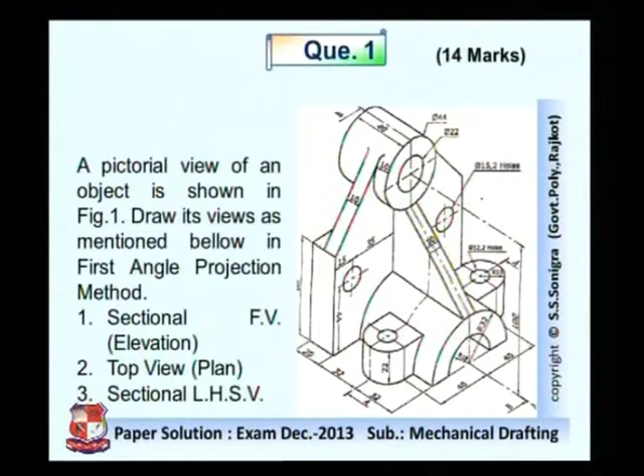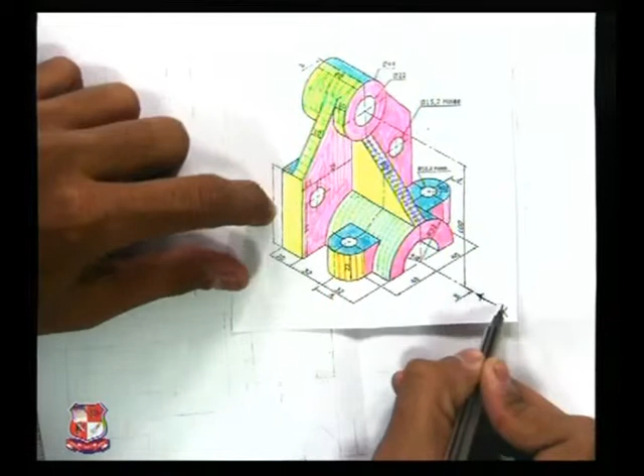See, this is an object which is given to us. In examination you will not be allowed to use colors, but you can imagine this colored portion from various views. Here an arrow is given; it means the front view should be drawn from this direction. If we look from this side, this pink colored portion would appear. Hence we have to draw all this pink colored portion with the given scale.

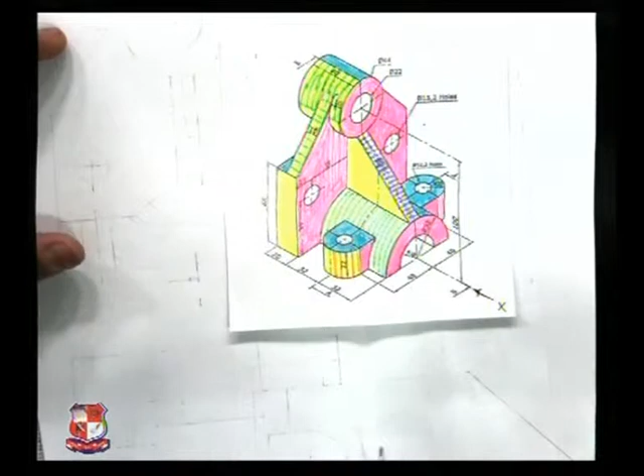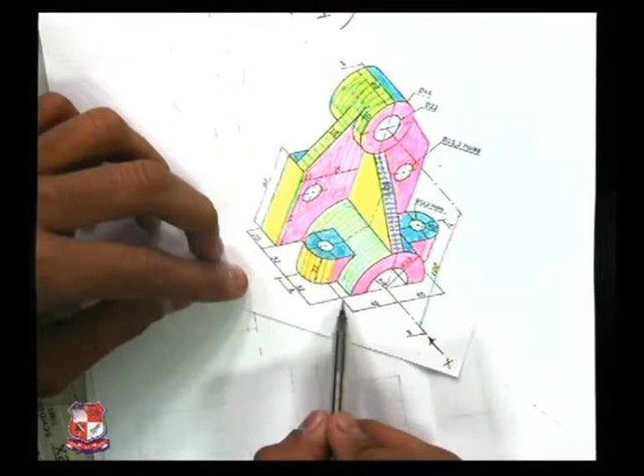Then the left hand side view is to be drawn to the right side of its front view, and the top view will be drawn below its front view. Hence we start from this corner. Here the width of this rectangle, means the width of its front view, would be: this is 40 from here to here, here to here 40, plus this radius which is given as 15. So 15 plus 40 plus 40 plus 15, that is 110 millimeter would be the total width.

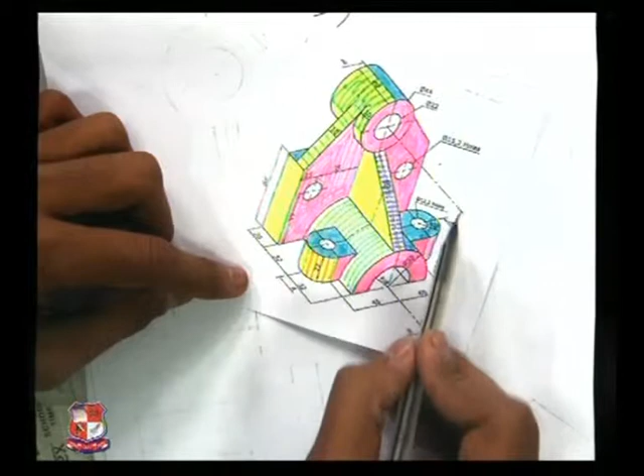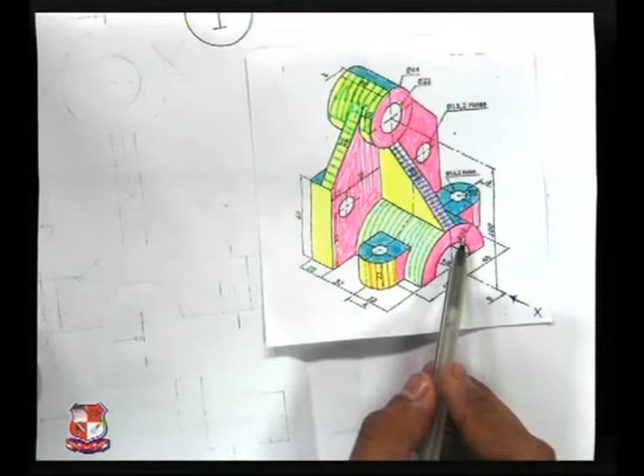So the width of this box is 110 millimeter, and the height of this box from here to here is given as 100, then 100 plus this radius 44, 144 millimeter would be the height of the rectangle in front view. So we start drawing its front view from this arc. Here an arc is given which will be visible, this pink colored arc. Outside radius is 32 millimeter and inside radius is 18 millimeter.

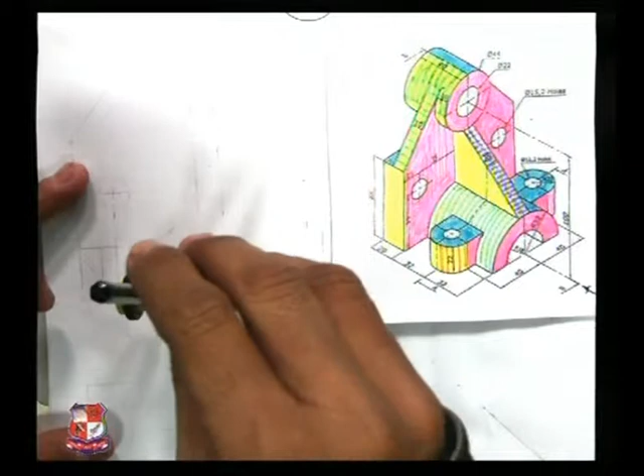So with the help of compass we can draw that arc. The inside radius is 18 millimeter, so here we draw an arc having 18 millimeter radius, and then the radius of the outside circle is given to us, this one, that is 32 millimeter. Hence take 32 millimeter as a radius and draw an arc like this. So these two arcs represent the half cylinder, which is here, this pink colored portion.

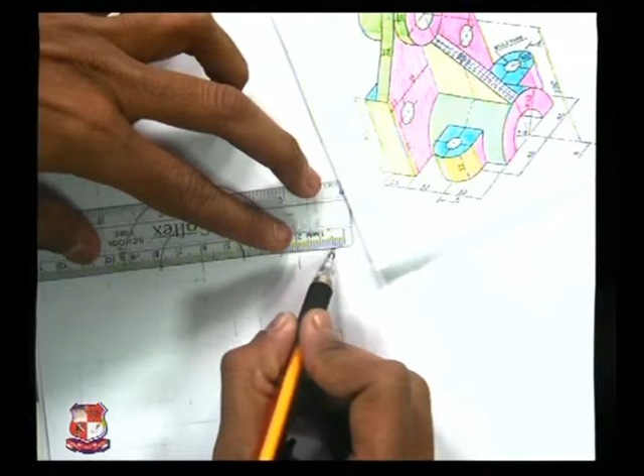Now think about this space. Here material is not there, hence it will not be visible, and these two edges would be fully visible. So that is to be represented by a full line like this. And here material is not there, hence that edge would not be visible, hence we trim that portion.

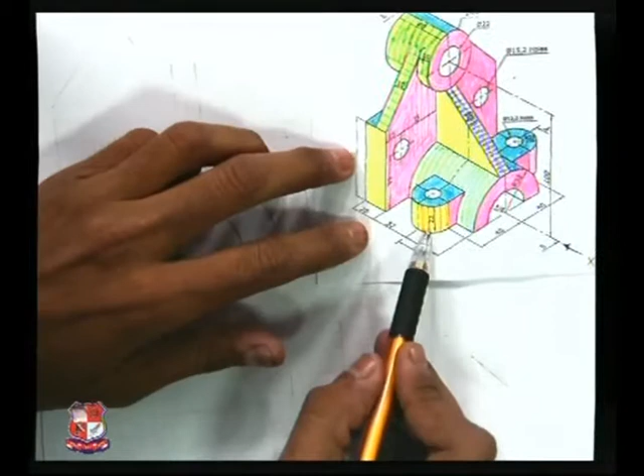So this edge from here to here, that we have drawn, and after that here this portion is there having height equal to 22 millimeter. So to draw this height of 22 millimeter, from this line at a distance of 22 millimeter on the upper side, draw a line from here to here. This total width is known to us, that is 40.

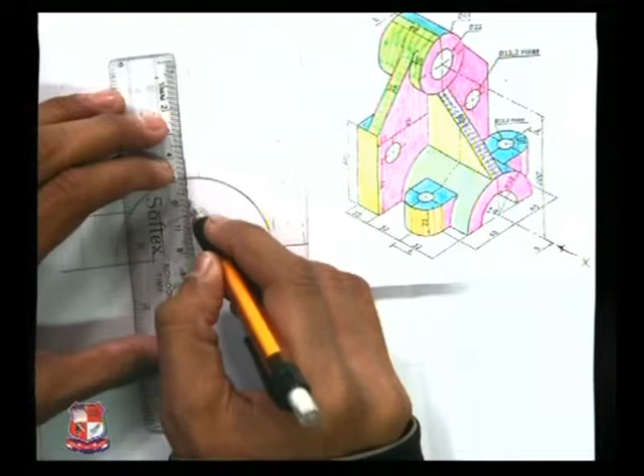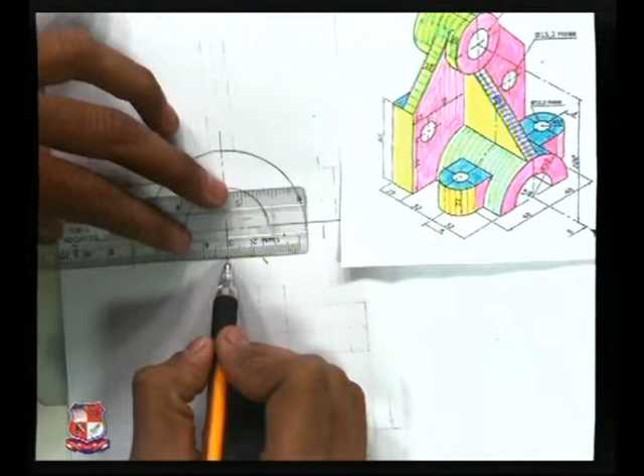The center line of this arc would be here, that we can draw like this. This is the center line of this arc. Here also a center line would be there, and from this center line at a distance of 40 millimeter on this side another center line is there, which is given in the data. So at a distance of 40 millimeter from here, draw another center line. This distance is 40 millimeter.

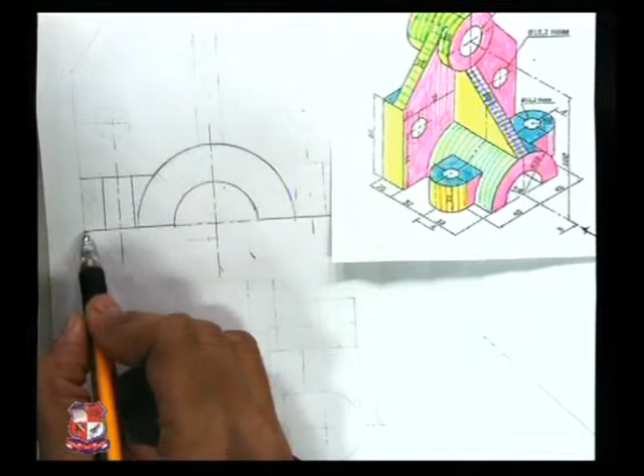Now here a circular hole is there, diameter is known to us, that is 12 millimeter. So 6 millimeter on either side, draw two vertical lines. It's a sectional view, so this hole will appear as two full lines. And here at a distance of 15 millimeter from the center, draw another line, 15 millimeter from this center to this side. So this one side is drawn. Similarly, on the other side the same object is there; as it's a symmetrical object, draw other lines like this.

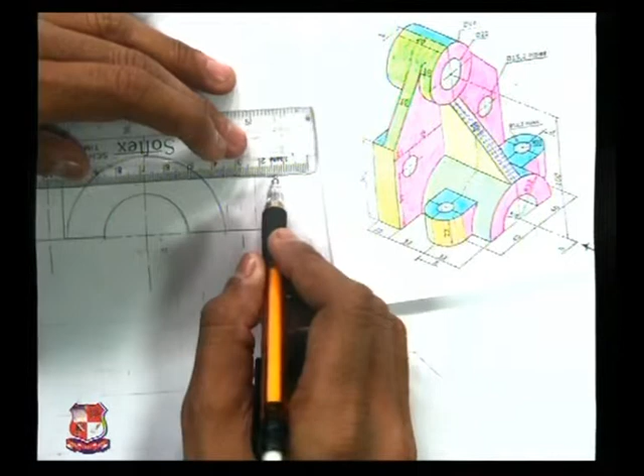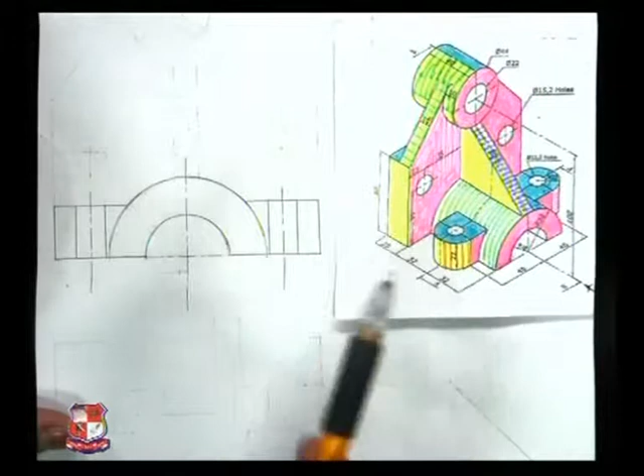And again here also draw a center line at a distance of 40 millimeter from the center of the two arcs we have drawn, and this represents a circular hole which is drilled over here. So till now we have drawn this pink colored portion and these two shapes.

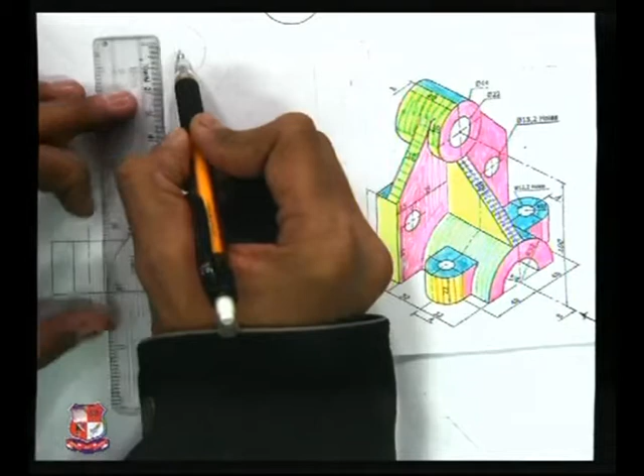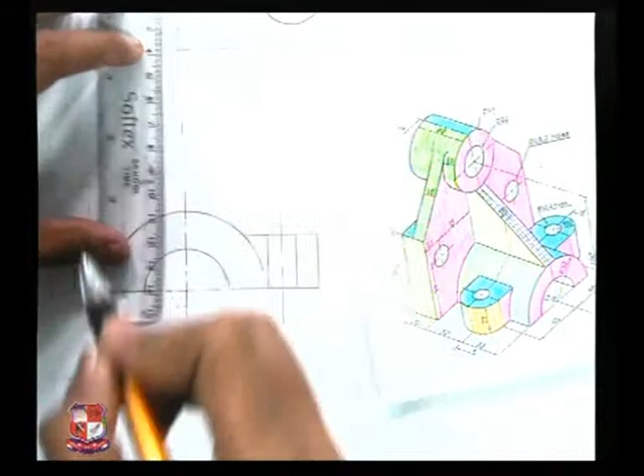Now think about this upper portion. Here the distance between this center and this center is given as 100 millimeter. So from here at a distance of 100 millimeter, that is 10 centimeter, mark a point, and from that point draw a center line of that circular hole. Center line to be drawn with one long dash and one short dash, and here the vertical center line would be there like this. And taking this point as a center, draw this circle.

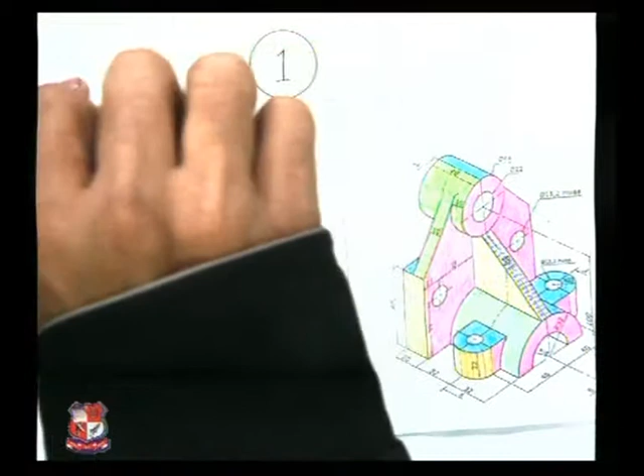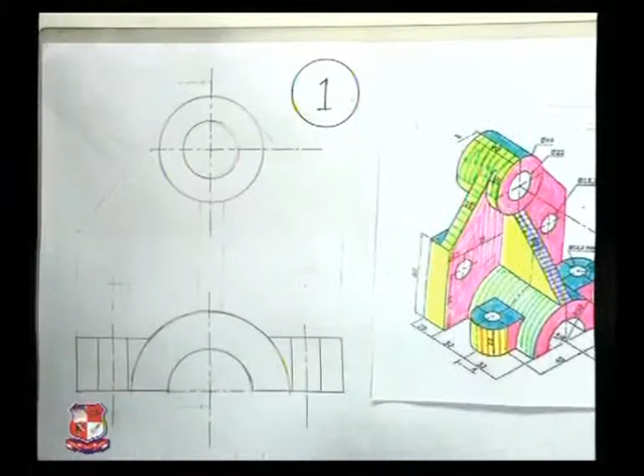The radius of this circle is given to us, diameter 22, so radius is equal to 11 millimeter. So take 11 millimeter as a radius and draw a circle from that center like this, and then an outer circle having 44 millimeter diameter, so 22 millimeter as a radius, and draw an outer circle like this. So till now we have drawn this upper cylindrical portion, pink colored portion.

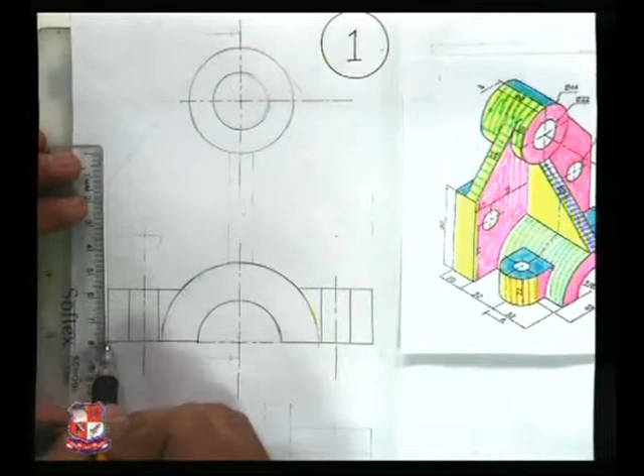Now what about this height? This height is given as 66 millimeter over here. So from this point at a distance of 66 millimeter, we draw a straight vertical line like this. From here at a distance of 66 millimeter, one line, and that line would be on both the sides. So on this side also draw a line at a distance of 66 millimeter above this line.

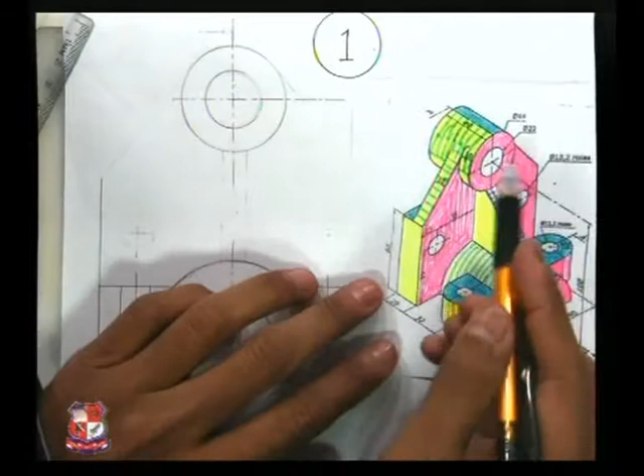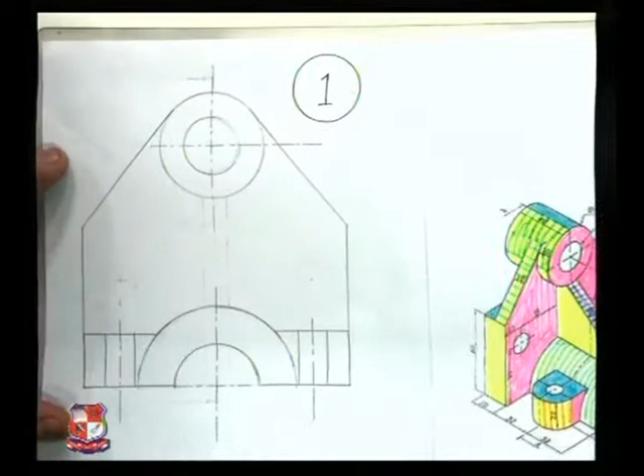Now from this point, here you can see this edge is tangent to this circular portion, this cylindrical portion. So from this point draw a line which is tangent to this circle. So it is to be drawn like this. From this point draw a line which is tangent to this circle on this side. Similarly, a line from this end to this side, tangent to the circle. So this is the front view of this object.

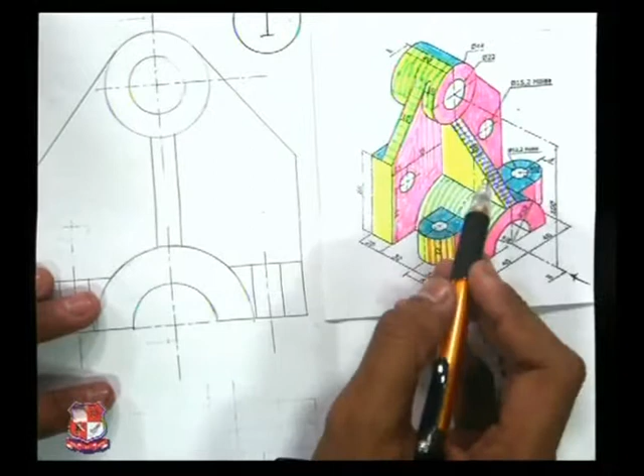Now about this strip having 10 millimeter thickness. So from the center line, 5 millimeter on both the sides, draw a straight vertical line like this. So these two vertical lines represent the thickness of this strip, which is tapered, but in front view it would appear as two straight vertical lines. Now here two circular holes are drilled, one is here, another is here. So for that locate its center line.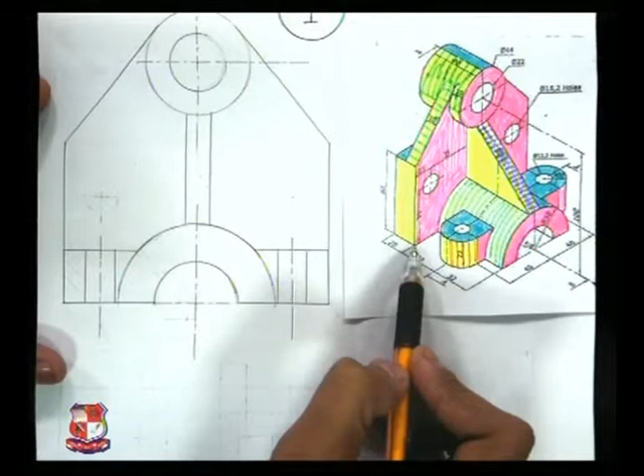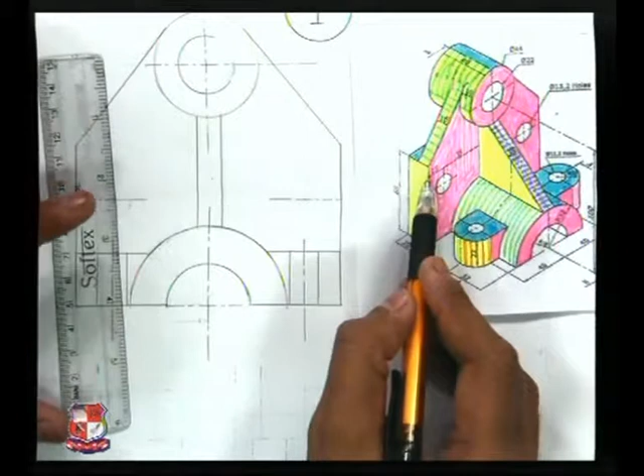Its center line is 44 millimeter above its base. So from here at a distance of 44 millimeter on the upper side, we draw a center line to show these two holes like this. Similarly, this center line is 15 millimeter from its one side and 35 millimeter from this. So 35 plus 5, that is 40. So 40 millimeter from this axis on this side, draw a center line for that hole like this. Similarly, on this side at a distance of 40 millimeter, draw a center line.

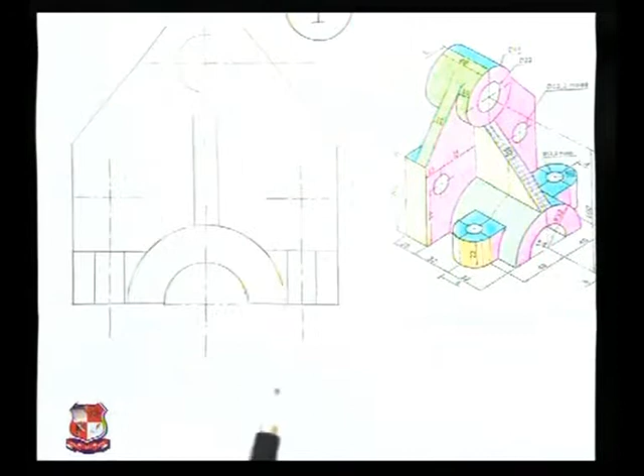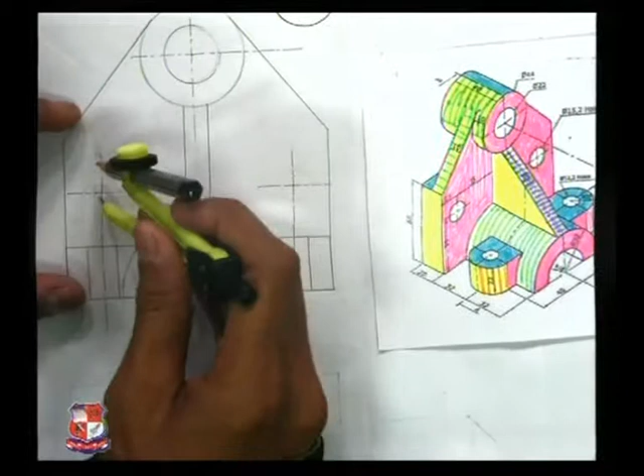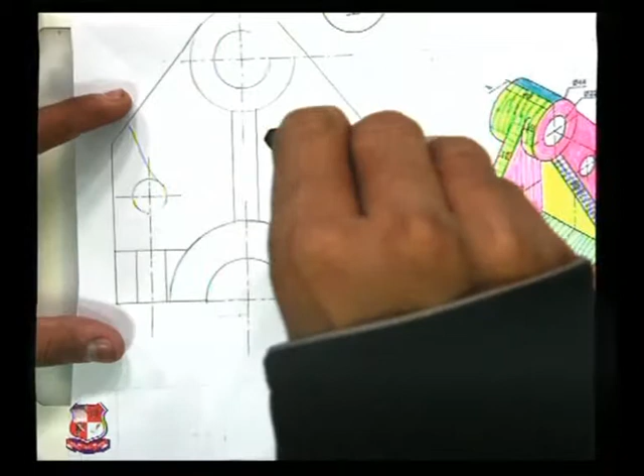Now from this center line, the diameter of this circular hole is given, that is 15 millimeter. You can see here it is given 15, 2 holes, means the diameter of this hole is 15 millimeter and there are 2 holes, one is here, another is here. So take 15 millimeter as a diameter, so 7.5 millimeter as a radius, and draw a circle taking these points as a center like this. One is on this side and another circle will be there on this side as well.

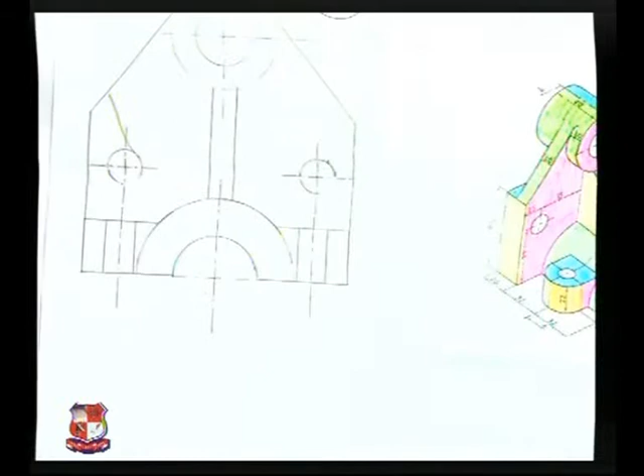A small circle is there, and this is to be erased, and insert the dimensions of this circle. 12 means the diameter of this circle is 12 millimeter.

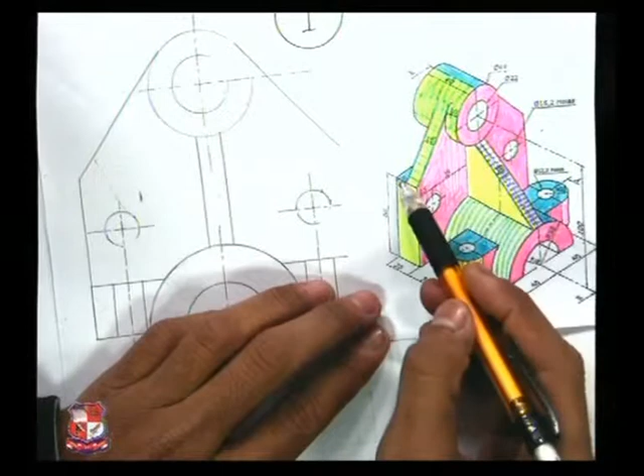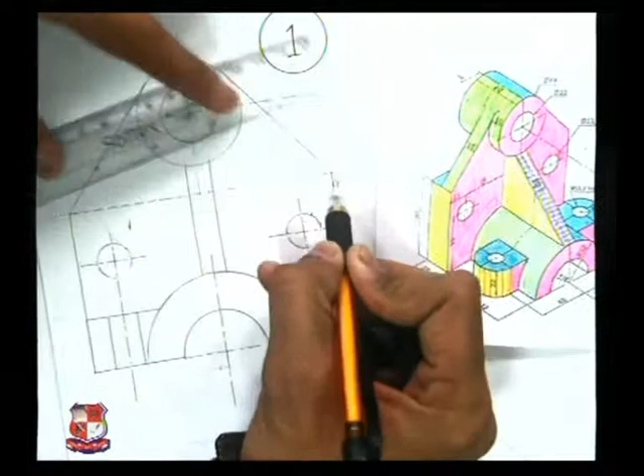Now after locating these 2 circles, the remaining portion is this edge. You can see here, if you look from this direction, here one edge is there and that edge would not be visible from this side. So that will be represented with a dotted line which starts from this end and ends here. So here a full dotted line will be there from this end to this end. This dotted line represents this edge which is behind this portion.

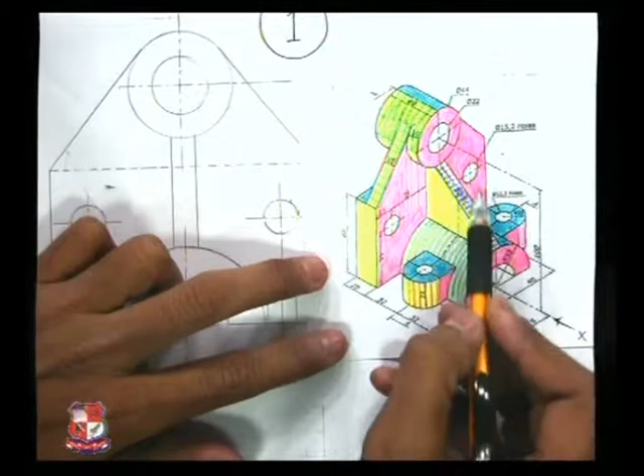Now the majority of the components of this object is shown. About the sectional front view: here a sectional front view is to be drawn, and the section line is drawn from here to here. So along this section line, this cylinder will be cut, this half cylinder will be cut, and this portion will be cut.

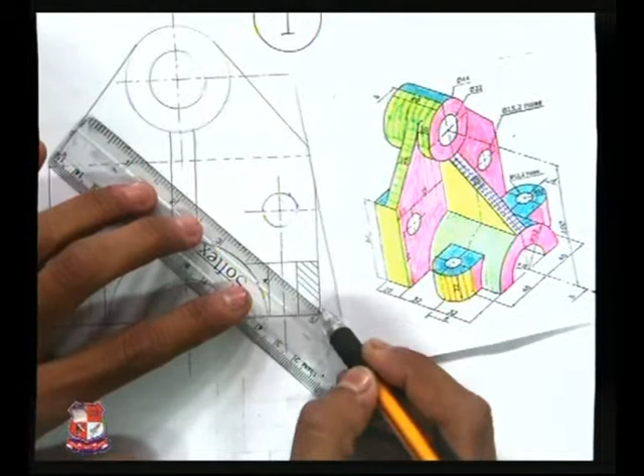So we have to represent that cut portion with section lines like this. A circular hole is there, so the 2 edges of the hole would appear as 2 straight vertical lines like this, and in that portion section lines should not be drawn because material is not there and material is not sliced at that portion. So we leave that portion blank and draw section lines here like this.

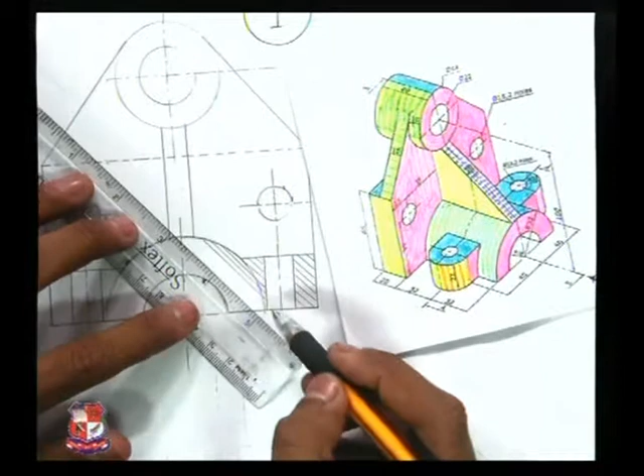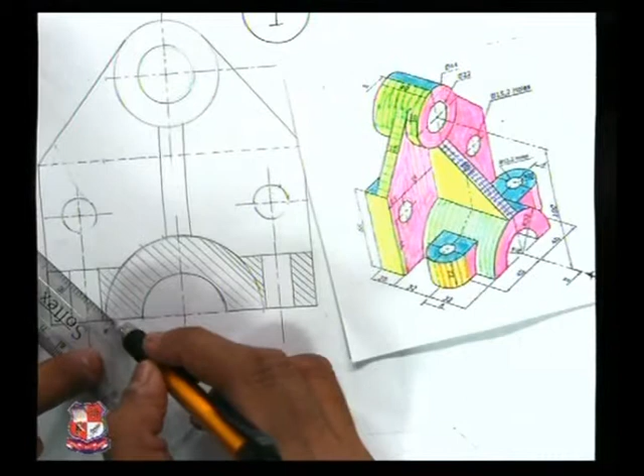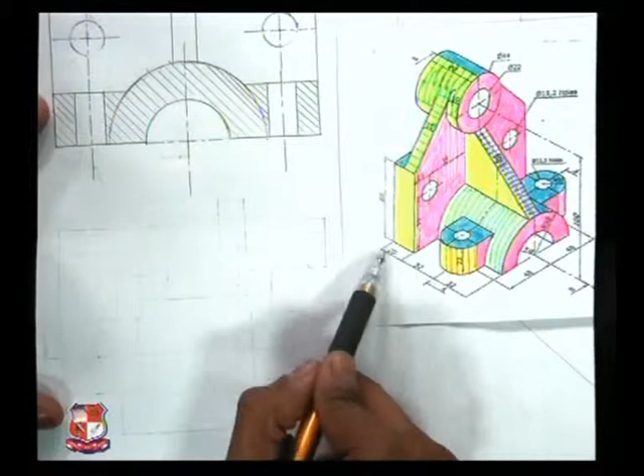Now after drawing the section lines, we plan its top view. In the top view, think about its height and width. Width of the top view would be similar to the width of the front view. Here the width of the front view is 110 millimeter, so the width of the top view will also be 110 millimeter. So draw a rectangle having width equal to 110 millimeter, and height we can find from its views. Height would be 20 plus 32 plus 32, so 64 plus 20, 84 would be the height in the top view.

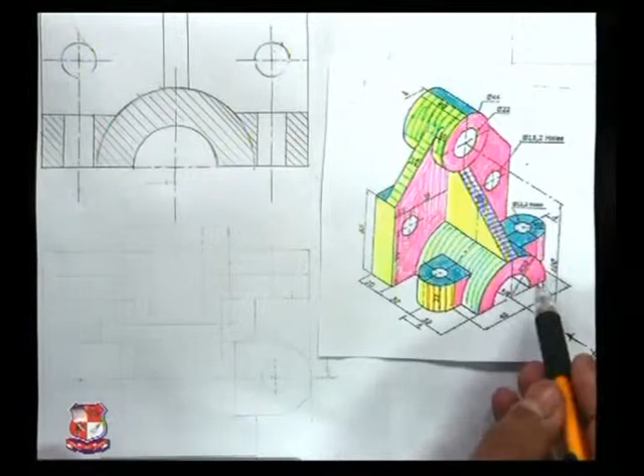So if you look from the top, we start drawing its top view from here. Here a horizontal line would be there. If you look from the top side, this arc would appear as a horizontal line, as shown in blue. So that is to be represented like this, and the width of this line would be equal to the diameter of this arc, that is 64 millimeter, and from here in top view it would appear like this.

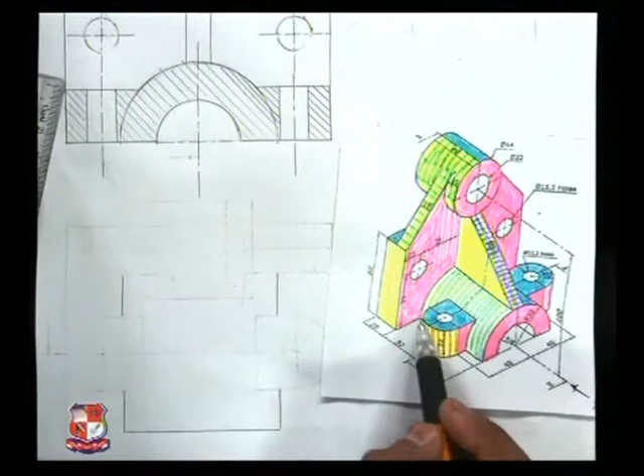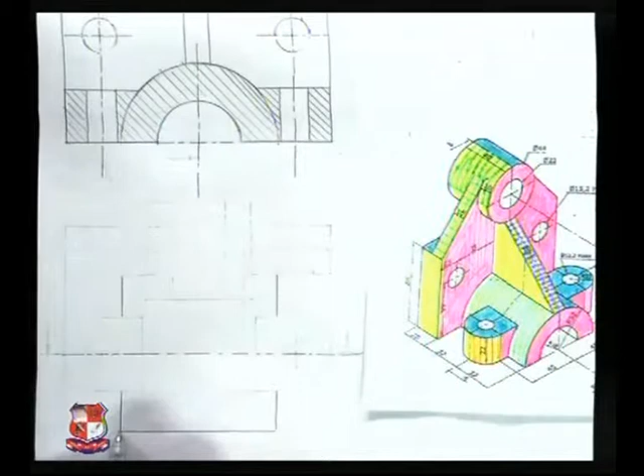Here these edges are there, so they are to be drawn like this, and this arc would appear in top view. So locate the center line of this circle, which is at a distance of 32 millimeter from this base, and draw a center line. The distance between this center line and this bottom edge is 32 millimeter, and the axes of both these holes are at a distance of 40 millimeter on both sides from its axis.

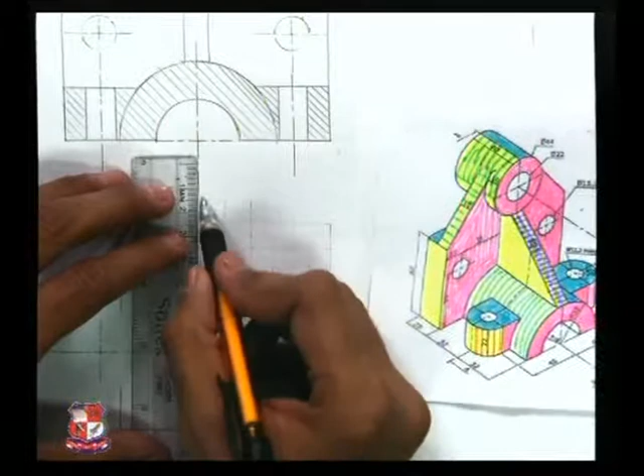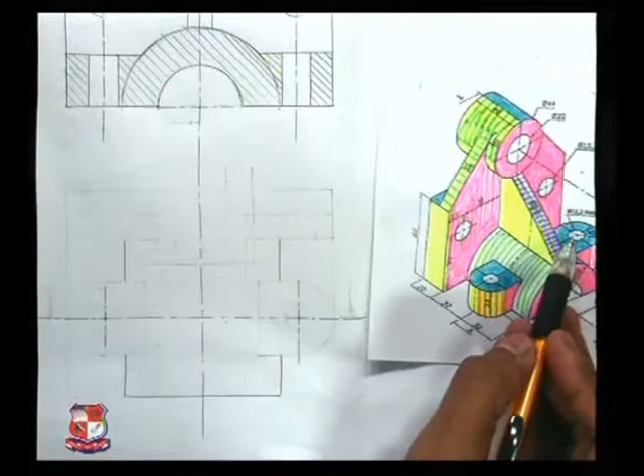This is the axis, and these two holes are at a distance of 80 millimeter from each other and 40 from its center line. Now taking this point as a center, draw a circle which represents a hole having diameter 12 millimeter; it will be visible as a circle in top view. And here an arc is there, having radius equal to 15 millimeter. So taking 15 millimeter as radius, draw an arc with this point as center.

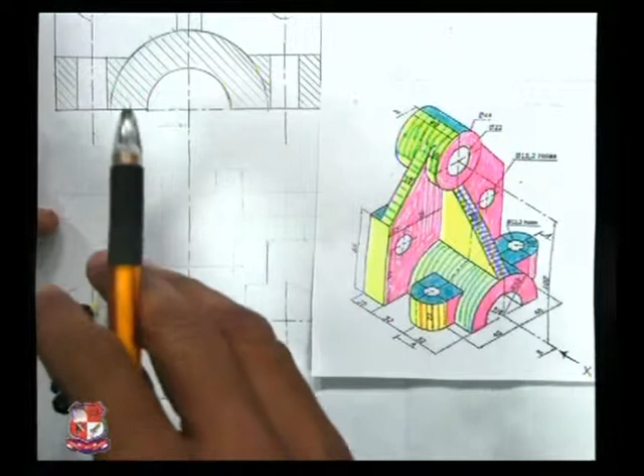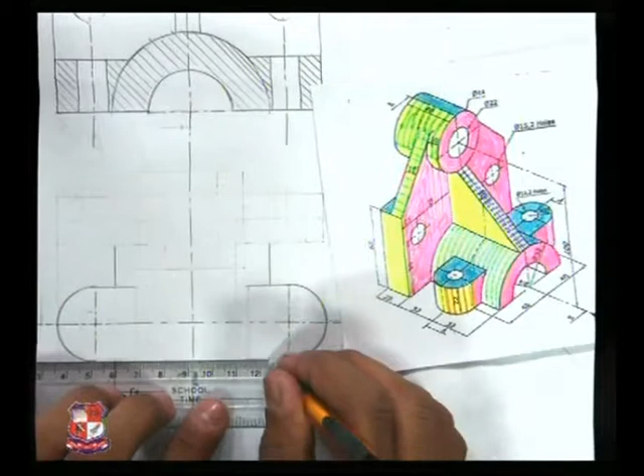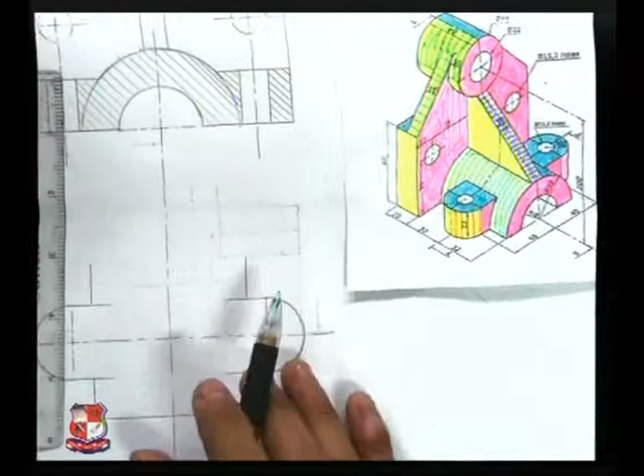So one arc is on this side. Similarly, another arc would be on this side having the same radius, and join these arcs with these lines like this, from here also, and here also. Now how to find the position of this point? We can find it from its front view. In the front view this tangent line cuts this circle over here. So from this point draw a straight vertical line, and it would touch over here, which would be the point of intersection for this arc and this cylinder. So draw lines here like this.

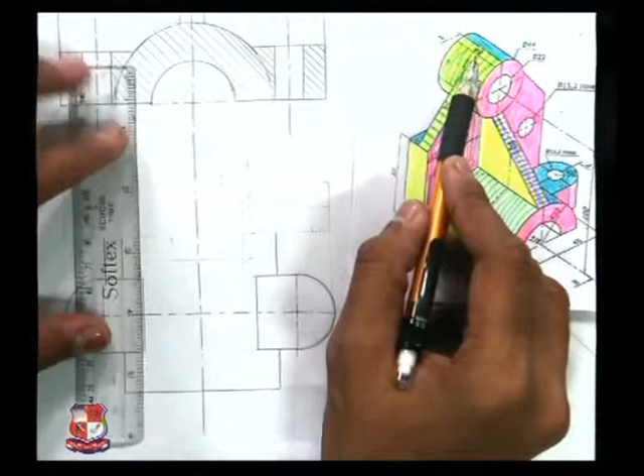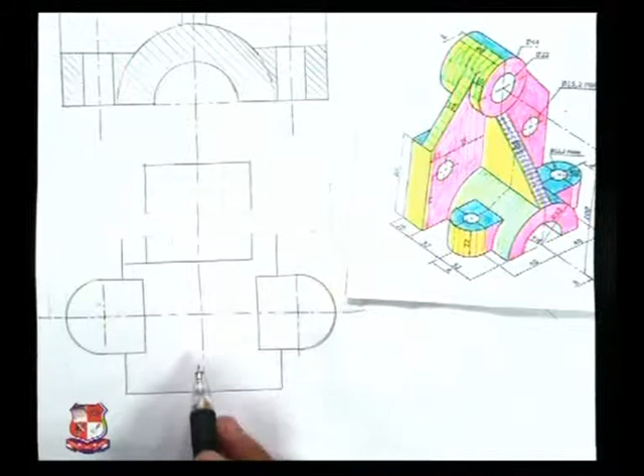Now if you look from the top, this cylinder would appear, and its height is 40 millimeter. So draw that cylinder as a rectangle in top view, having height equal to 40 millimeter and width equal to the diameter of the cylinder, given as 44 millimeter. This is the outside line of the cylinder, and the cylinder has a circular hole, which we represent by dotted lines like this. The distance between these two dotted lines equals the hole diameter, given as 22 millimeter.

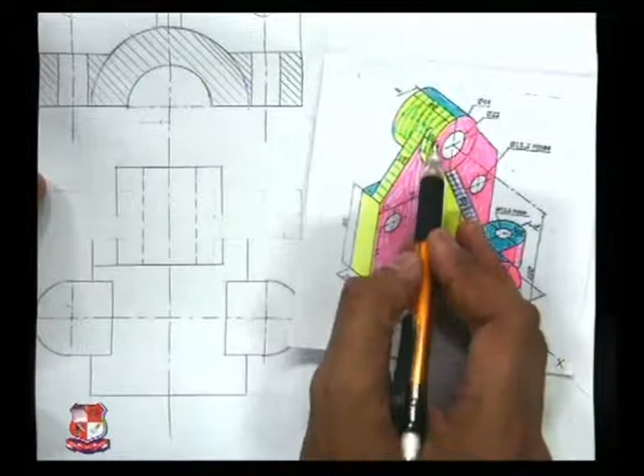Now after drawing this cylinder, we think about this strip. This strip has a thickness of 10 millimeter. So draw lines over here at a distance of 10 millimeter. One line is here, another line is here. The distance between these two lines is 10 millimeter. That is the thickness.